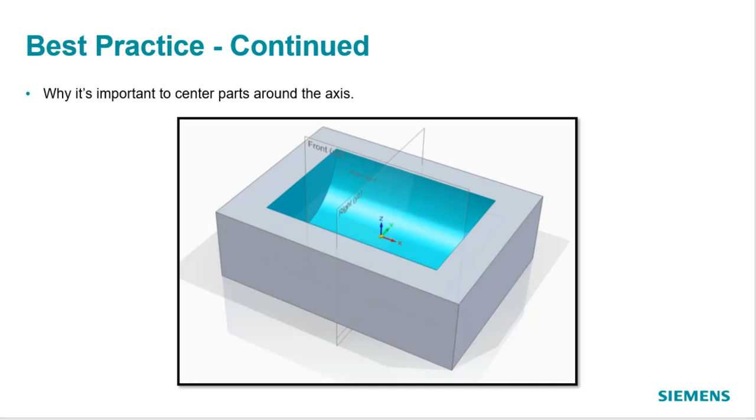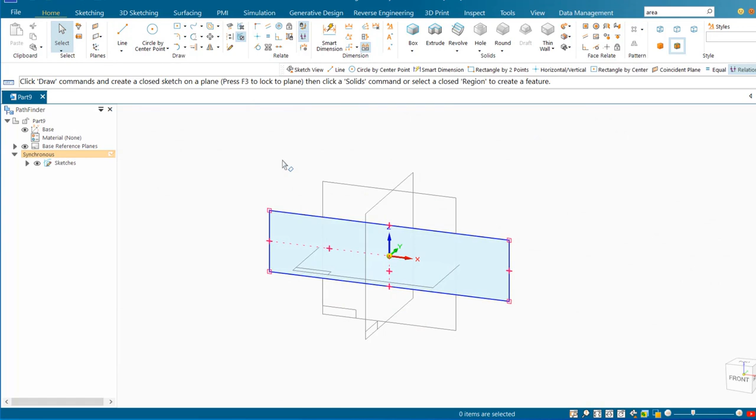Let's start with our rectangle by center, and we'll lock to our reference plane. Again, the key here is locking to the coordinate system axis. So I'll just come out here and draw some sort of a box. It doesn't matter what size. Then come out to the select button, identify in that region, and we'll just push that out a certain distance. Just the general idea is all we're after here.

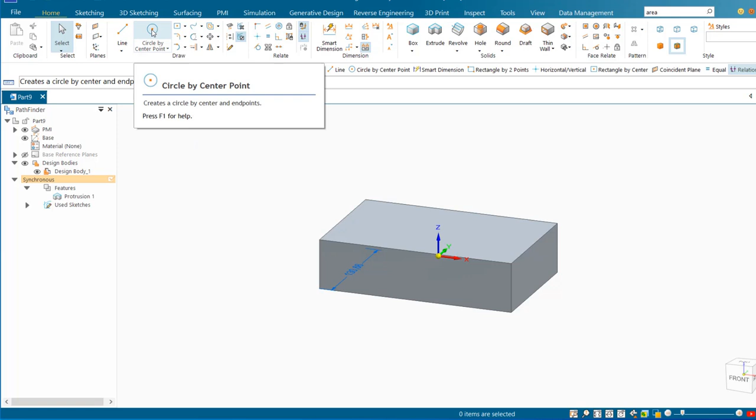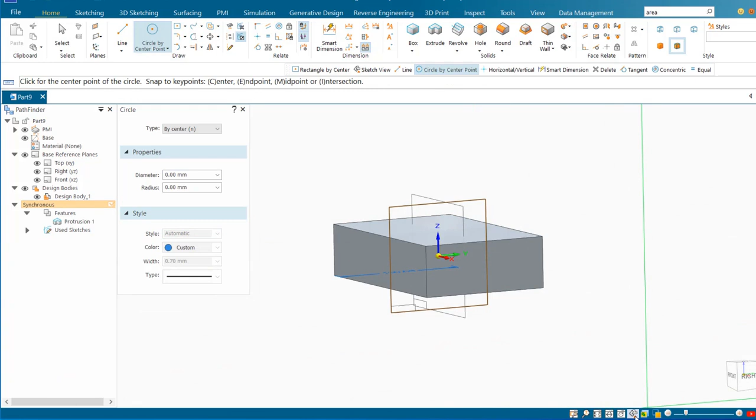Now, how do we get that half circle shape in here and dig it out so it's centered? The key is to come to a full circle. It's a lot easier to draw full parts. Then spin this around, and let's see, I want the right reference plane. So I'm going to identify this reference plane right here. Again, circle by center, lock, and I'm going to square this up with sketch view.

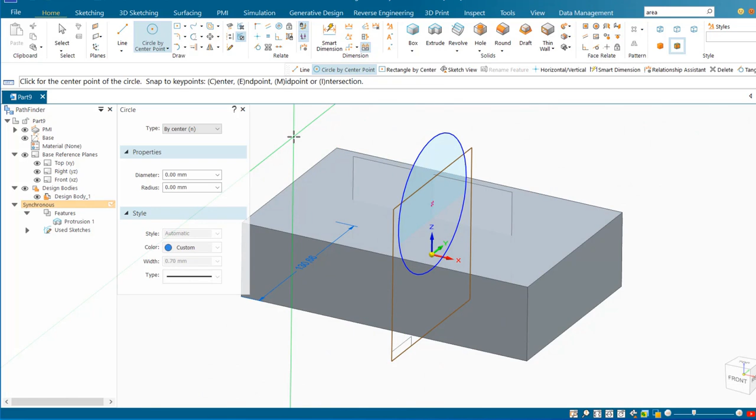And now I can come over here and draw the circle anywhere here, and we could just start, as long as it's centered. I'm just going to come up and make sure it is centered. So I'll draw this circle, zoom in, rotate this around. And so by using the reference planes, which were there by default, I didn't have to create anything else.

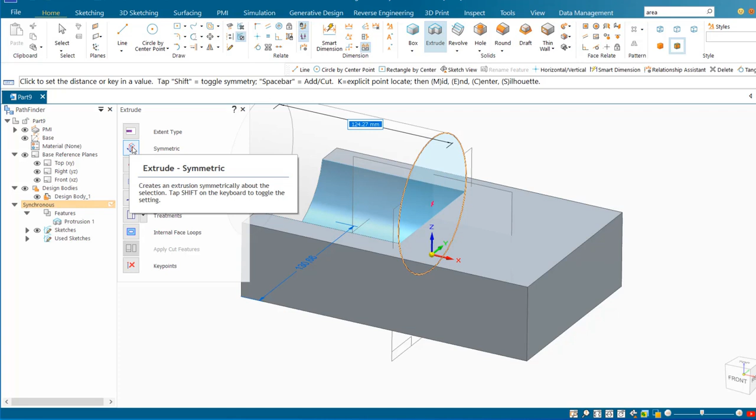Now when I come up to the select button, I can identify this region and pull this out. And the key here is, if this wasn't on symmetric, then it would just go one way. But I want it to go both ways because I'm working around the reference plane. So I'll turn on symmetric, and we'll just push that out a certain distance, and we know it's equal both sides.

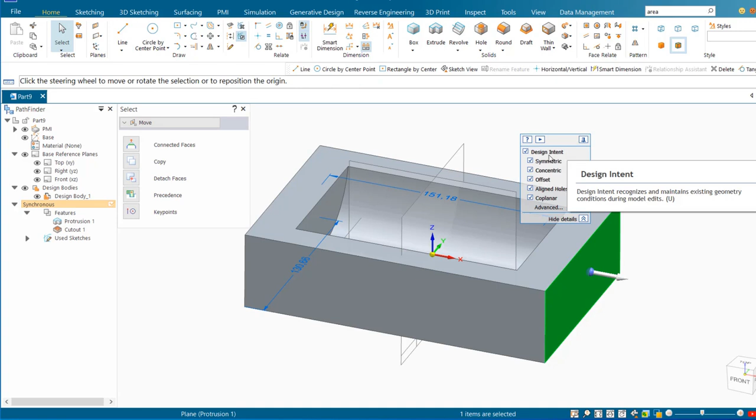Now if I come back up to the select button and identify any of these faces, just say grab the end face, and because of design intent being on and it's looking for symmetric, once I grab that, this will push out. Okay, it goes both ways. And then if I went in and grabbed the inside face, just one of them, again because of design intent, I could adjust that accordingly.

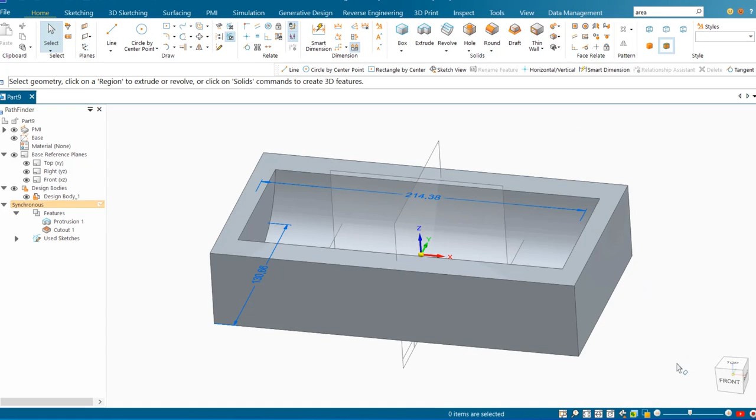If you'd like to move these faces together, you can simply box pick one end, grab the arrow, just move that in or out. So that adjusts all four faces at once. And again, this is why it's critical to build around the coordinate system, the center reference planes.